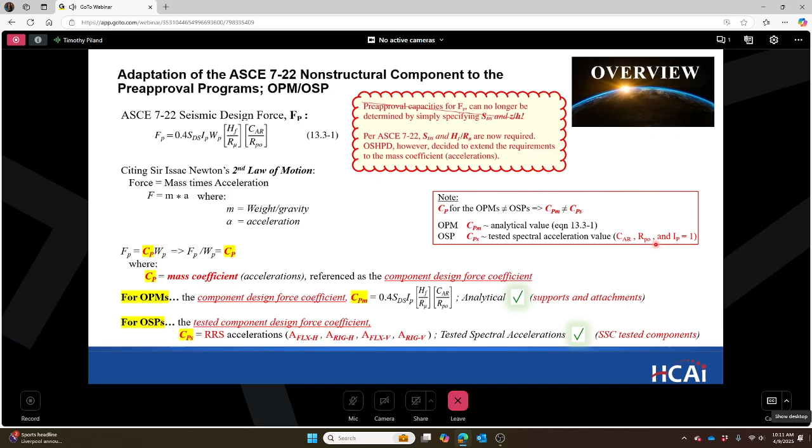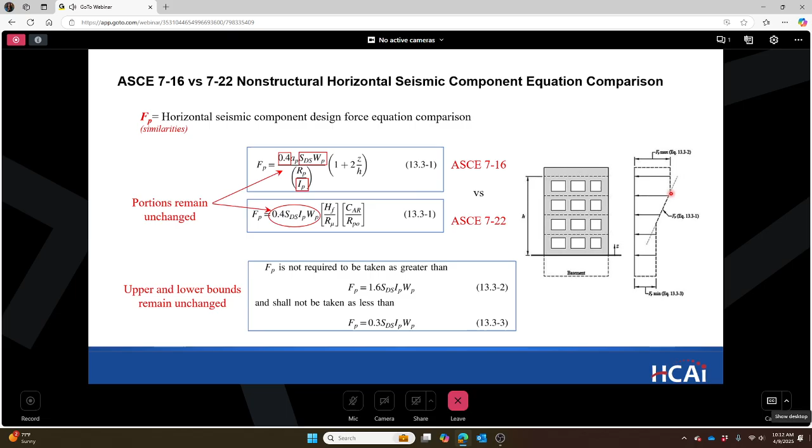So we have A sub P over R sub P, which is now C sub AR over R sub PO. Yes, they have new names and yes, they have new values, but they represent the same thing. It's the component amplification factor or the component resonance ductility factor. The R sub P is the component response modification factor, and the R sub PO is the component strength factor. Same, I would say it's the same.

The C sub AR and A sub P are similar, as both variables possibly amplify the component response, the ability to achieve resonance. The C sub AR is the peak component acceleration divided by the peak floor acceleration. It has to do with the component flexibility and the ratio of component to building period and the ductility.

R sub PO and R sub P are similar in that both variables possibly reduce the component response, where R sub PO is a component inherent overstrength. And you can see as the building and the component coincide, how the amplitude goes up over here. That's just representative.

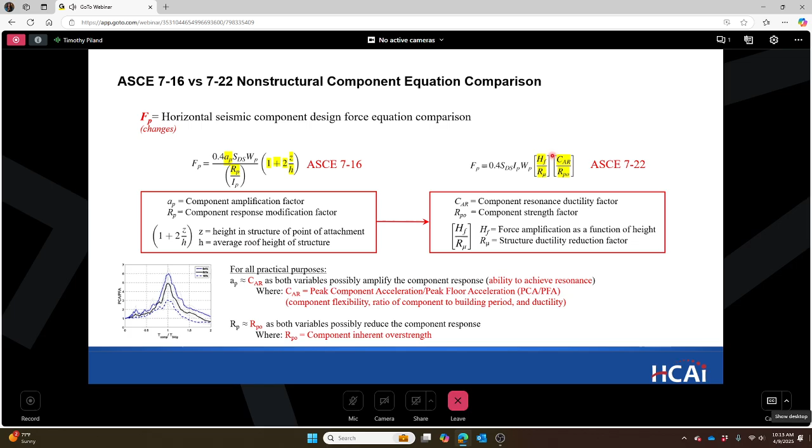The H sub F, going back here, we have the H sub F over the R sub mu. We just went over the C sub AR or the R sub PO. Now we're going to go over the H sub F over R sub mu. H sub F represents basically the old 1 plus 2 times Z over H. Well, now it's 1 plus 2.5 times Z over H. So it's kind of the same as it was before.

There is another variation of it if you happen to know the building period. Here's an example where if you know the building period, it's to your advantage, because it can reduce the maximum value of H sub F. Like this one, where the building period is 2 seconds, the H sub F went from 3.5 using the default equation down to 2.46 using these equations here. This is the lowest approximate fundamental period of the supporting building or non-building structure.

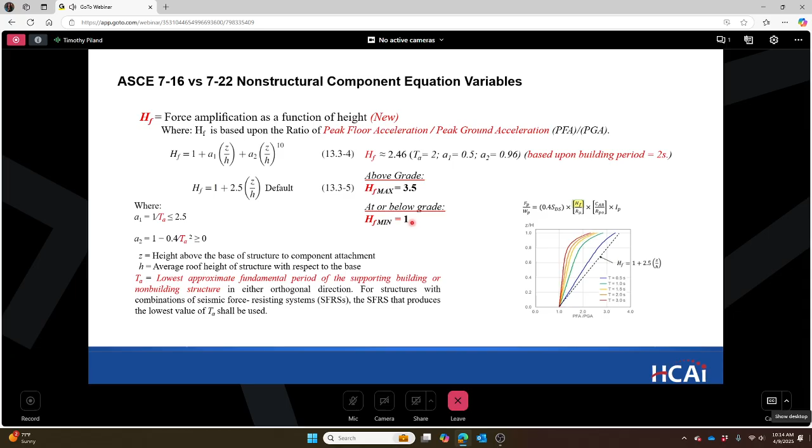Okay, so this webinar is related to pre-approvals. For the pre-approvals, we have H sub F max, which is 3.5. At or below grade, it is 1. That's going to come into play here when I show you the next slide.

We're talking about R sub mu now. This is the new component. F sub P is now a function of the building seismic force resisting system. R sub mu is a function of the response modification coefficient from table 12.2-1 or 15.4-1, and obviously the overstrength factor from the same tables. When it has to do with the ductility reduction factor, when the ductility of the structure goes up, R sub mu goes up, F sub P goes down.

So if you look over here, you have a building that's concrete shear wall rather, and you can see how the force is greater at the same period between that and a steel moment frame, which has more ductility. Now this is just a common sense concept: the more ductile your structure, the less force the structure will attract, the less force that will go into your component. So as you increase ductility, your F sub P goes down.

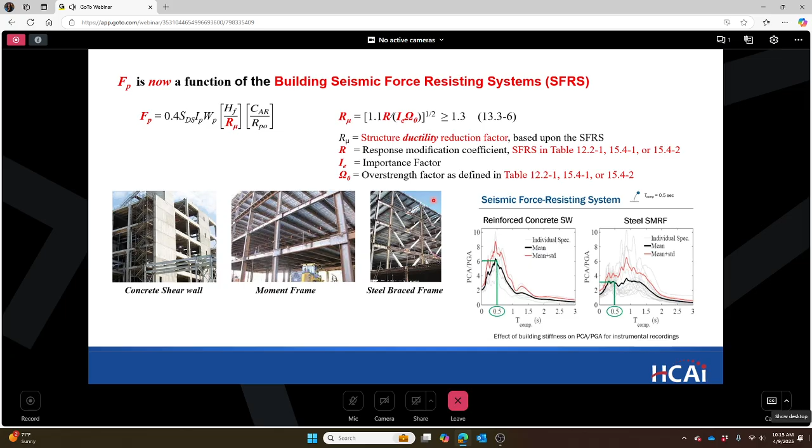So a little bit more on the R sub mu. The R sub mu structural ductility factor is new. It's based on the building's ductility, as we just spoke of. Because this is for pre-approvals, the maximum value you can get for R sub mu, for only one single force resisting system—and I'll show all the force resisting systems on the next few slides—is 1.71, but that's only for one system. The minimum value, if it's above grade, or if the lateral system of your building is unknown, is 1.3. If it's at or below grade, the R sub mu is 1.

So for the pre-approvals, resulting in the H sub F over the R sub mu maximum is 2.69, which is above grade or at the roof. H sub F over R sub mu minimum is equal to 1, at or below grade. So as a minimum, all pre-approvals must be certified for either one or both conditions, dependent upon the non-structural component. Obviously you're not going to put an 87,000 pound genset on the roof, so this one above grade will not pertain—you will only have the one at grade. You can do intermediate levels, but these are the two requirements for the pre-approvals with regard to the OPMs and the OSPs.

Okay, so for the supports and attachments and for certification of the component, we have to make these pre-approvals readily available for any structure anywhere in the state of California for project use. That's the intent, is to reduce the efforts by the registered design professional to use these pre-approvals. It should be readily apparent to them as to whether or not these pre-approvals are applicable to their project.

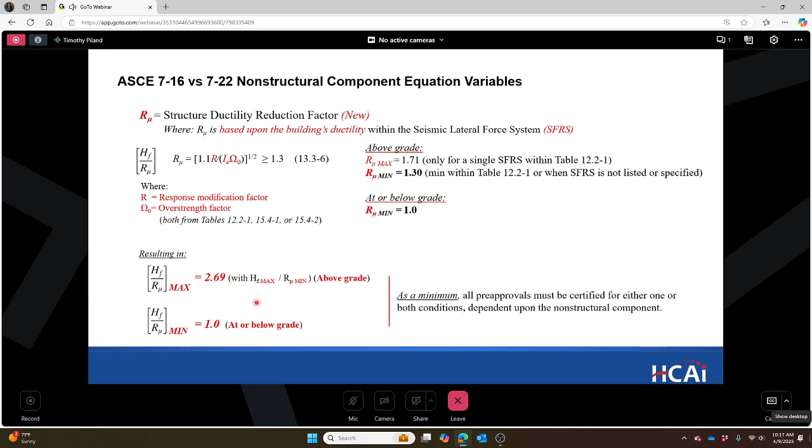So that's why we're putting these minimum requirements within the pre-approval. They'll be on the drawings or in the OSP document itself, for the OPMs and the OSP document themselves. They'll also be on the application for the OSPs.

Okay, so here's the different R sub mu values. This is where R sub mu is 1.3 to less than 1.4. These are mostly structures that have very little ductility, concrete moment frames or whatever. Everything in red are the special systems. I've just created this, you can see they vary. Some of them go up to 1.35 here. There's different variations, as this is the minimum value, which is used by a lot of non-ductile systems.

Okay, and here's the 1.4, it's less than or equal to 1.5 for the R sub mu. Now here you have steel special moment frames, you're going to be in this area a lot. So if the OPM or the OSP is designed to the minimum and maximum values, you can use this to your advantage if you know the seismic force resisting system of your structure. Because if it's a special moment frame, you can reduce the demand that your project will have on the component. So it's to your advantage to use the R sub mu for the building. If you decide not to use it, you have to use 1.3.

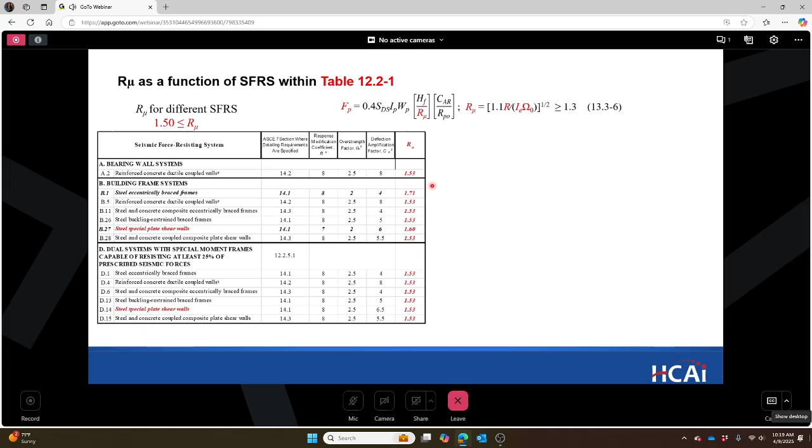Okay, so that's really the only significant change to the ASCE 722 from the 716, the incorporation of the building lateral force resisting system. And it makes perfect sense to incorporate the structure that you're attaching the component within, because if the structure is going to damp out the forces, well then less force is going to go to your component.

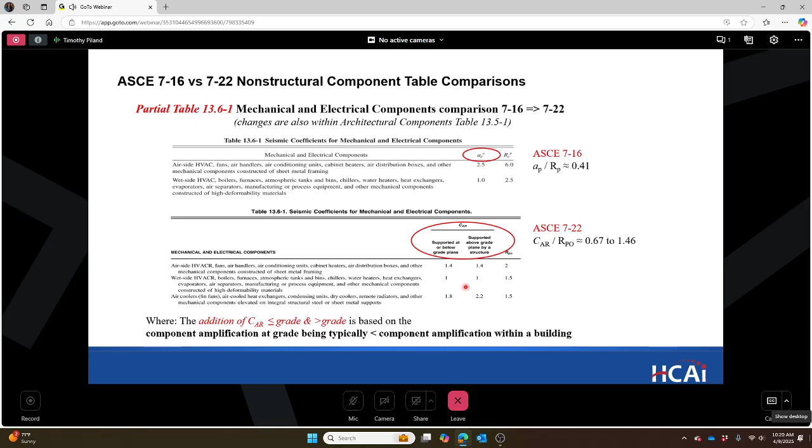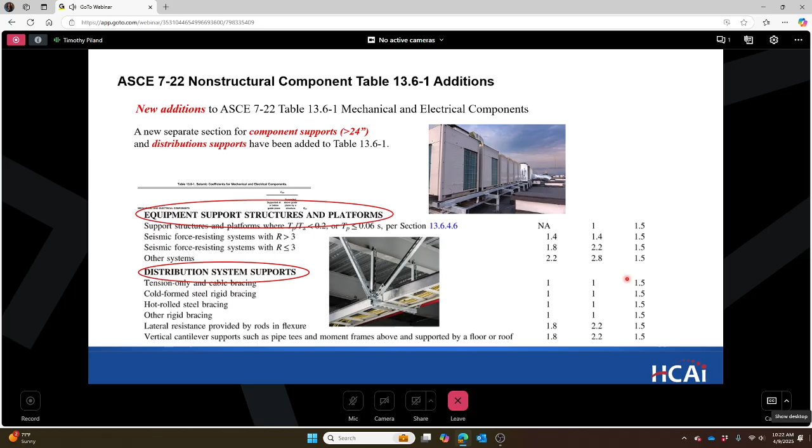So let's go into equipment, support, structures, and platform in a little bit more detail. This is where it gets kind of verbose. So what constitutes equipment, support, structures, and platforms? Well, the commentary classifies it into three groups.

Distribution supports are not equipment supports. Don't confuse the two, these are two different entities. Distribution support is separate from equipment support. Okay, so we're talking about equipment supports.

Now, the three categories that the commentary breaks them down into: the first one is technically not a support, which is one of the three groups. If it's less than or equal to 24 inches, it's not an equipment support. So up to 24 inches is considered an integral support. I don't care if it's a lug, skirt, or saddle, it doesn't matter. You have to design the connectivity between that and the component with the same C sub AR and R sub PO that you would do the component. But anything up to 24 inches is not an equipment support.

If it's over 24 inches, they break it down into two categories, although for all practical purposes, it gets the same C sub AR and R sub PO, so it's kind of moot. It's the assembly of structure members that provide support for a piece of equipment or system, including the moment frame, brace frame, skids, and legs greater than 24 inches. This is where the commentary also delineates equipment supports from equipment platforms, with platforms supporting multiple components or systems, but the differences are inconsequential, as both equipment supports and platforms have the same C sub AR lateral coefficients, so it doesn't really make any difference.

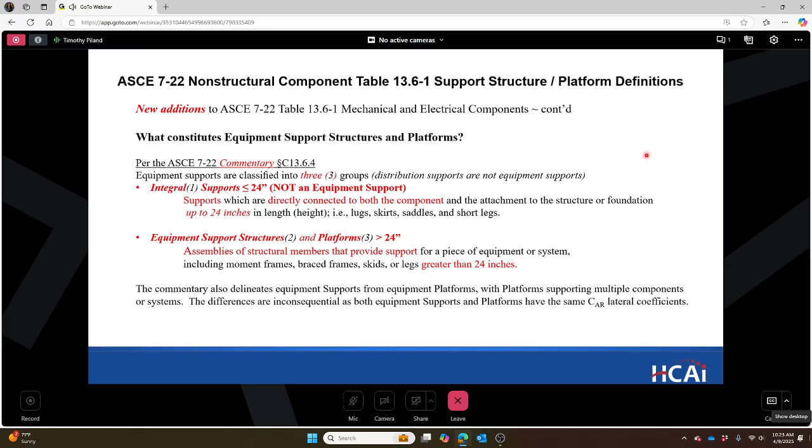Now, when you think of a support or a platform, you think of something supporting it from the base, right? Because that's just natural, it's supporting it. However, let's look at these three different cases here. This is the first one: it's 24 inches, so this is not an equipment support or a platform. I don't care if they're legs, lugs, or skirts, it doesn't matter. If it's up to 24 inches, it's not an equipment support.

Okay, this is suspended equipment. And if this is greater than 24 inches, this is considered a support. This is the integral support down here, which connects to whatever your component is, but this portion is considered an equipment support. This is going to make a difference in some of the OPMs. And this is the equipment platform, which is an obvious one—if it's greater than 24 inches, then it's a platform.

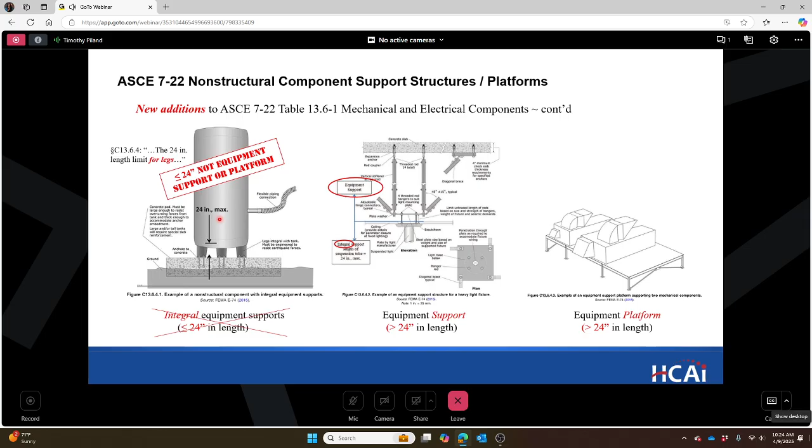Hopefully that's really clear, these two are the ones that we're talking about. This is not an equipment support platform. So now we go into the different categories for the equipment, support, structures, and platforms. There's four you can choose from. First one deals with the component, the T sub P.

Okay, so let's talk about what the T sub P is. It's the fundamental period of the component, including the support and platform and attachments per section 13.3.3—we call it the component assembly. If it's greater than 24 inches, then the entire assembly period is what you're trying to determine. And if you have a component which is flexible, I don't care how rigid your support is, the entire component assembly is going to be flexible. It's not going to be rigid, no matter how you look at it. And this is the approximate fundamental period of the building.

So you look at this first section here, and I'll go into all these different categories on the next slide. But it says, this is a note that I added here, 13.3.1.3: the component resonance ductility factor for mechanical electrical equipment mounted on equipment and supporting platforms shall not be less than the component resonant ductility factor used for the equipment support structure or platform itself. So the translation is, if a component is attached to a support greater than 24 inches, the component C sub AR must be greater than or equal to the support platform. Okay, that's what that means.

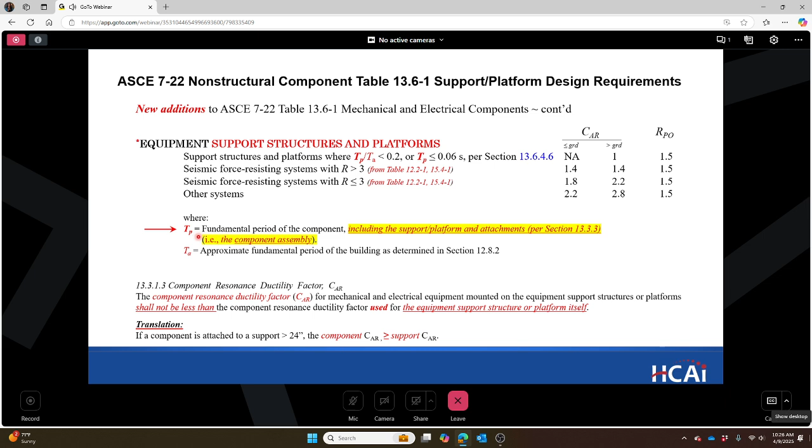So now we have the four different systems, and we have the fundamental period for the component assembly, or the fundamental period for the building and the component assembly, T sub P. So let's talk about T sub P for just a second, because this is going to get a little complicated. We'll accept any version of what you submit if you provide a basis, but it has to meet some logical engineering approach in order for us to accept it. So this is the period determination of a component assembly: the fundamental period of the component, including supports and platforms attachments per section 13.3.3, as I mentioned on the previous slide.

It's component assembly. The component period is not a function, nor is it related to C sub AR. It used to be that if your A sub P was 1, your component was considered rigid by some people. It's like, that has nothing to do with whether the component is rigid or not.

The C sub AR, which is the component resonance ductility factor, ability to achieve resonance. So in the commentary in 13.3.3, the component period states in part, the fundamental period, T sub P, shall be determined by the typical period equation.

Further stating, provided the component supports and attachments can be reasonably represented by a single degree of freedom, spring, and mass system. I can tell you for sure that active and energized systems typically cannot be modeled this way. You just can't do it. Now maybe perhaps for shelving, but CT equipment or other components that are in both the OPM and the OSPs, you may be hard pressed to prove that it's a single degree of freedom, spring, and mass system.

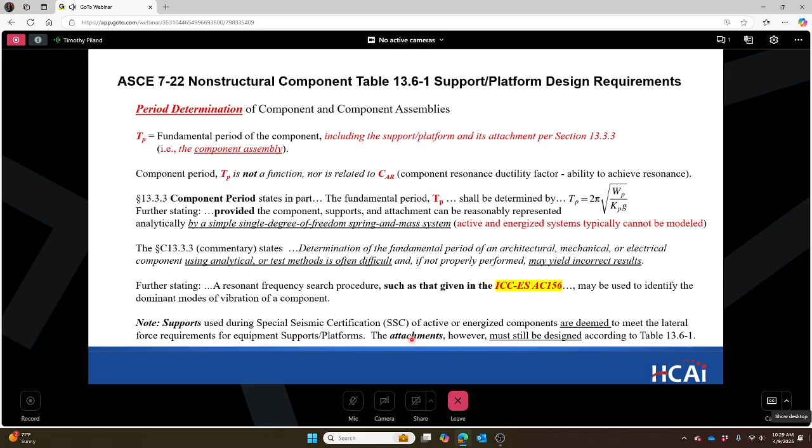So if your component is on a support and you shake table test it, that connectivity between the component and the support, as well as both pieces of equipment, are seismically certified to be installed based on the AFLX accelerations that the component was tested to. So you don't have to worry about the support if you shake table tested it with the equipment.

So we go into the 4 different sections. First one is 1A and 1B. We've seen this before on the 2 slides back. We have the component assembly period over the building period. So what this says is, if the component assembly period is less than 20% of the building period, then you can use C sub AR of 1 and R sub PO of 1.5, which is this. If it's at grade, you can't even use this section for the building, obviously.

Now we're talking about T sub P. This is the first section we're talking about. This is 1B, the footnote 1B. If a component is within a building or structure, and the component assembly is rigid, then you can use the C sub AR of 1 and the R sub PO of 1.5.

Using a support and platform designed using Chapter 14 material standards. So like I was saying on the previous slides, this condition is going to be very difficult for active and energized components and for a lot of the OPM equipment that used to be anchored, if it's in the OPMs, if in fact it's on a support. You're going to be hard pressed to get the entire assembly to be rigid.

Go to number 2. Number 2 has 2 sections. These are the R values. Must conform to table 12.2-1 for both of these conditions, where you have an R greater than 3 and R less than 3. And you have different values over here for at grade, above grade, and the R sub PO.

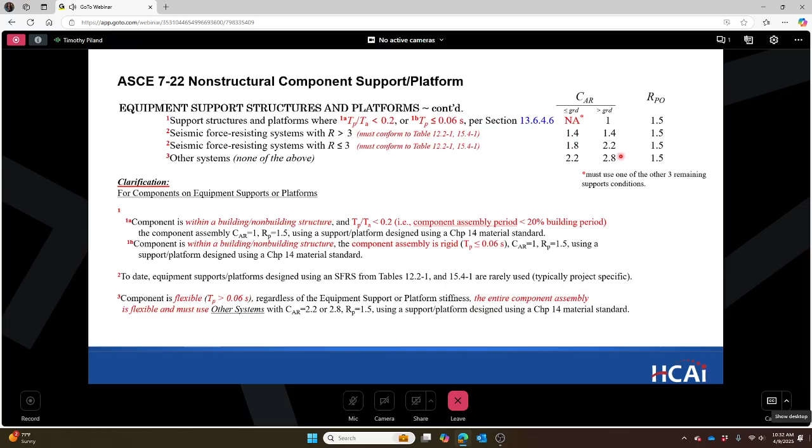Here's an example. There's other examples. This wasn't the best one, but it's the one I had. This used to be a video, but it didn't lend itself to a PowerPoint presentation. So you have a rigid support. It doesn't look like it's rigid, but it is because it mirrors the shake table if you see the video. And this is a flexible component, so the entire assembly is flexible.

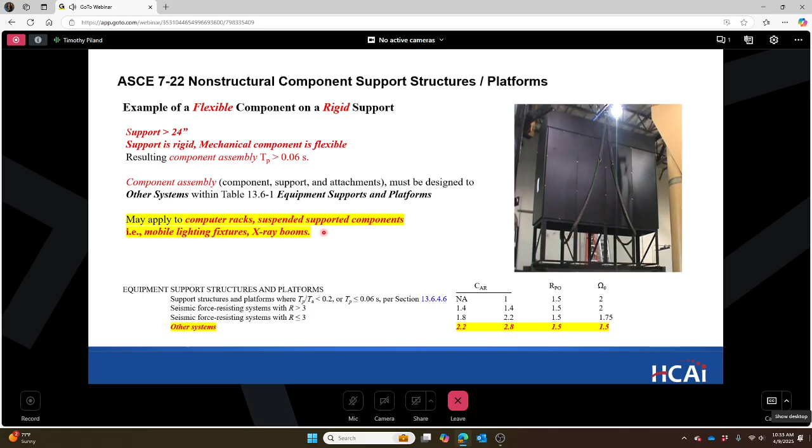As a result, you have to use the other systems within table 13.6-1, the 2.2 and the 2.8. This is for the design of the component connectivity to the support, and the design of the support to the structure, and the design of the support itself, actually. This may apply to computer racks, because computer racks are nothing more than supports, suspended and supported components, i.e. mobile lighting fixtures, X-ray booms, etc. So this is a significant increase for the supports.

Now we talk about distribution system supports. These are new, so there are 6 different categories. 4 of them are bracing - they're bracing, it's 1 and 1.5. Other than bracing, it's 1.8 at grade, 2.2 above grade. It's pretty simple.

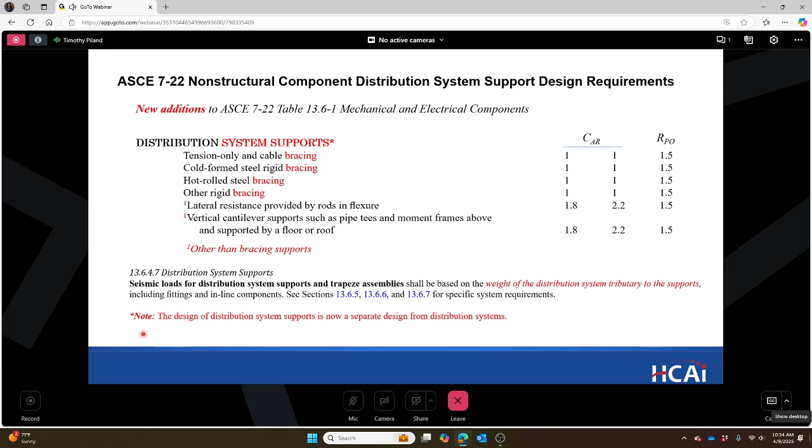The bracing is designed for the distribution system, separate from the design of the distribution system. The distribution systems have their own C sub AR and R sub PO values. How you design the support, it shall be based on the weight of the distribution system tributary to the support. You don't use the C sub AR or the R sub PO for the distribution system for the support. The support has its own C sub AR and its own R sub PO. That's why I put this note here: the design of distribution system supports is now a separate design from the distribution itself. And you can look up these sections for specific requirements.

I just added this slide because the 722 will incorporate the SDS percentage increase across the state of California. And you can see from this picture that was given to me by Dr. Hussein Bhatia that the majority of the cases they've gone up.

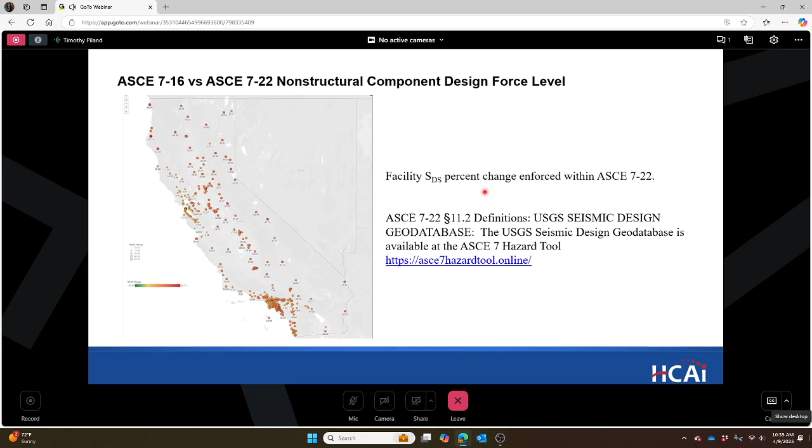So make sure you incorporate the new SDS for your specific site for your project. This is for the project design engineers. Okay, and you just need to go to the Hazard Tool and determine what your SDS is for the site.

So now we're going to go into comparisons between the 716 and the 722. It doesn't always look this grim. Okay, so this is mechanical electrical components.

This plot over here is using two different values. It uses the old value for mechanical electrical components, typically air-side HVAC units and motor control systems as an example. So the C sub AR is 1.4, the R sub PO is 2. In 716, it was 2.5 and 6. Now I just used a random SDS value of 1.6, and a Z over H equal to 1. The I sub P is 1.5. And for this, I show the R sub mu varies

across the bottom. And the T sub A for the building period varies, and it varies here down to where you get to the previous code, which is the current code, which is 716. So a T sub A of 2 is this bottom purple line here. And as the period gets smaller, it goes up to the default equation where your H sub F is using the default value.

So for mechanical and electrical components, if you're in a moment frame and you don't use the building period, you're going to be here because it's an R sub mu of 1.4. And this is the default value for the 722, the force level, compared to the 716. If you don't know the lateral system, or you have a lateral system which has very little ductility, you will be over here. So this is a significant increase, but do not despair.

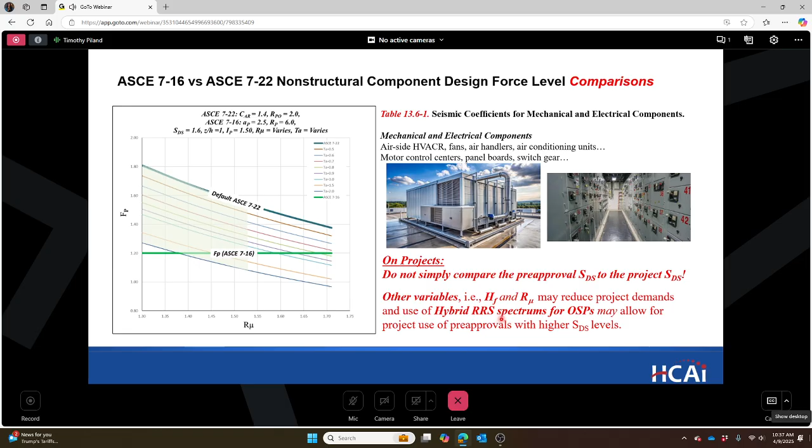At this point, I need to interject this, directed towards manufacturers. I don't know how many manufacturers are attending today's meeting, but it's in your best interest to renew your pre-approval to the current code. For one, it's more readily usable by the registered design professional on projects, who is basically your client because they're buying your product. With the C sub P value I talked about earlier, that's going to be listed on the pre-approval, and the design professional of record will simply calculate his project demand, the C sub P for his project, and compare it to the capacity C sub P of the pre-approval.

The second reason to upgrade all the pre-approvals, the OPMs and the OSPs, is that some of the forces go down. So it's in your best interest, because the code level is less restrictive on the newly adopted code.

You can use it for a 716 project, for a 2022 project which uses 716. The typical methodology is that the authority having jurisdiction, in this case OSHPD, if the code is less restrictive on an upcoming code, and we've adopted that code in its entirety, or at least the part we're referring to, then you can use that on current codes.

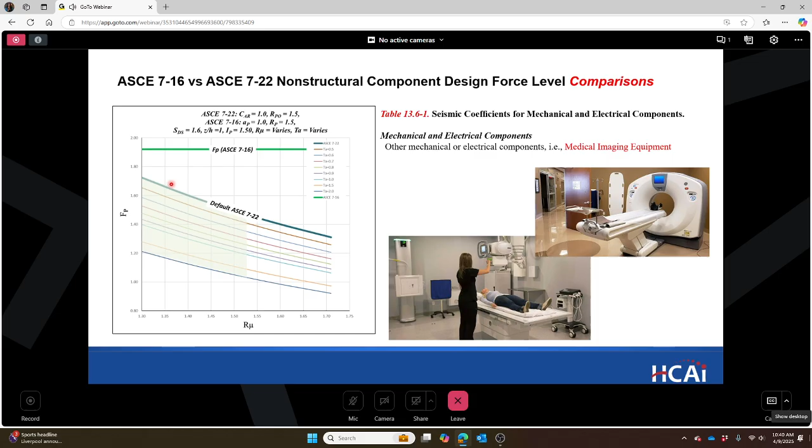If you don't know what it is, it's gone up significantly over here. But if you upgrade your pre-approval, it will meet the current code for the 2025 CBC without complications—the design professional of record won't be confused about what capacity the old version of the pre-approval was designed to. Going back to a previous version, like 716, for an OPM designed to 716 requires an extra step to determine its capacity. If you update it, there's no extra step, so it'll expedite the entire process.

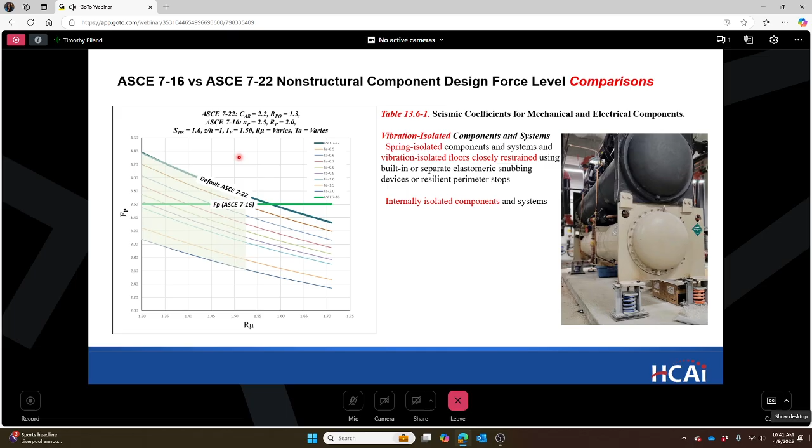So it behooves the manufacturers to renew their OPMs, the distribution OPMs, to take advantage of this and use them in the current code.

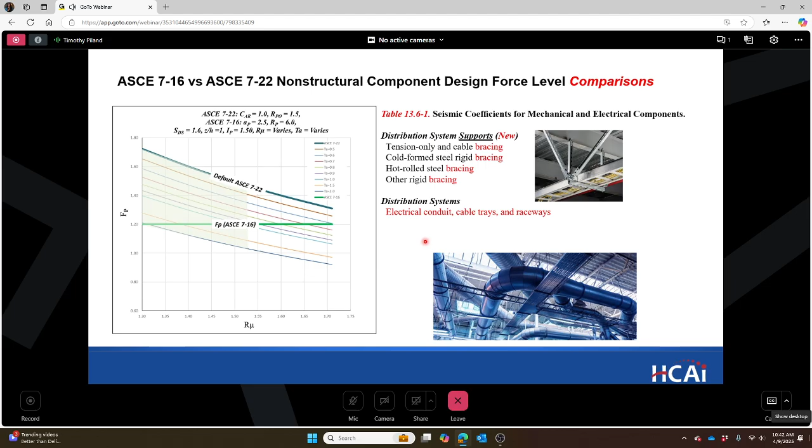And this happens to be the distribution system supports. You can see how the supports now have gone up.

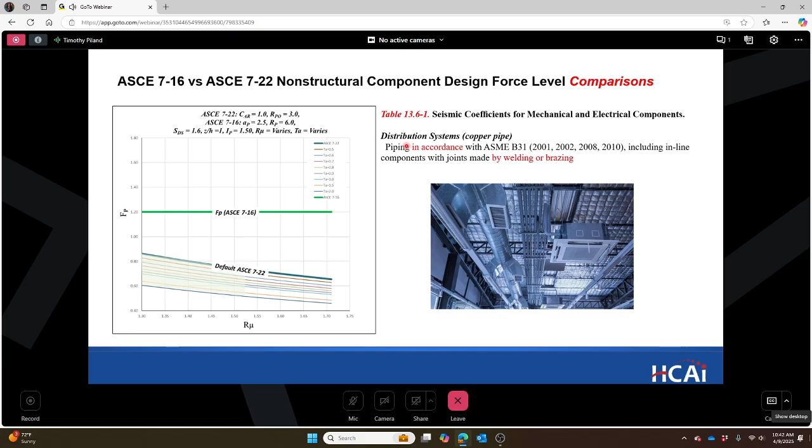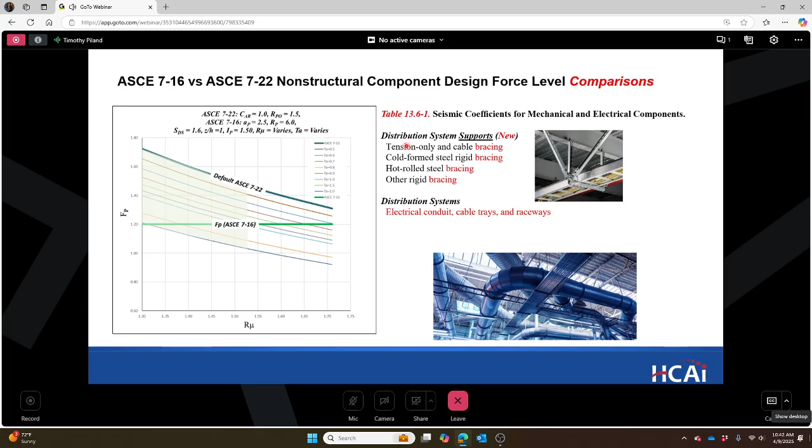So although if I go back here and look at the distribution system, the spacing will increase—you'll be able to make or increase the spacing rather, but the supports will be farther apart because there's less demand on the distribution system. And then the supports will be a little more robust, but it may balance out by the time you determine the load to the support itself, because on the existing pre-approvals, they've already been designed to a higher value.

This is one I picked from 13.5-1, coefficient for architectural components. These are partitions, now separated into less than 9 feet and above 9 feet. You can see if you don't account for the building period here, they increase for less than 9 feet, and they significantly go up for partition walls in moment frames, maybe twofold or so. So this is a significant increase.

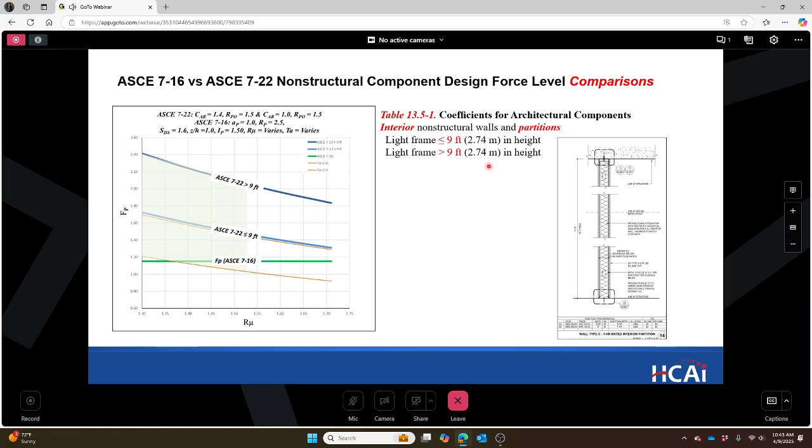So we have the affected OSHPD pre-approval program. For the OPDs, there's 1, 2, and 3. Those are in-house pre-approval programs, and we're going to do those in-house and redistribute them out on our website so everybody can use them with the new code. We only need to concern ourselves in this webinar with the OPMs and the OSPs. And as stated below, the OPDs are being updated.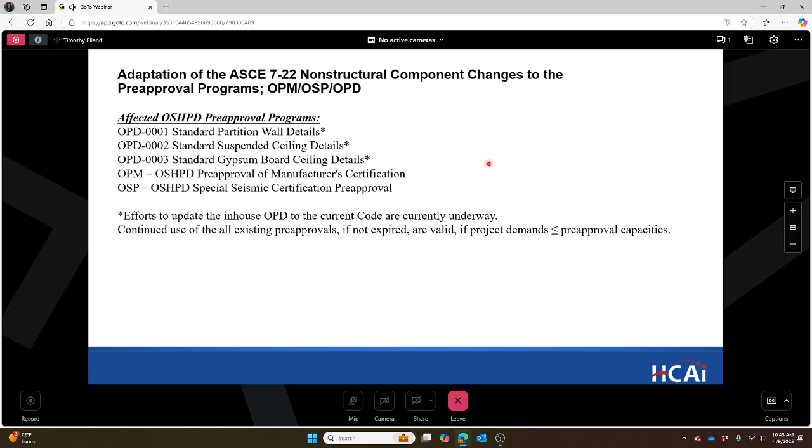So, can you use the existing pre-approvals for 2025 projects? Yes, you can. You don't have to do anything. The only one you can't use is an OSP which is expired. Everything else is fine, you can just leave it alone.

You don't have to change anything. So the existing OPM pre-approvals are valid for any project, regardless of the CBC version. Renewal and new OPM pre-approvals for 2025, however, require updated calculations and drawing revisions reflecting the current code. The OPM will have a new updated application, which we should have on our website by July 1st.

That's our goal, is to get the updated application for the new OPM pre-approvals. The existing OSP pre-approvals, which have not expired, are valid for use on any project, regardless of the CBC version. Existing shake table tests are valid on any projects also. The renewal and new OSP pre-approvals will require an updated application that'll list the C/P values for the OSPs, which is the horizontal accelerations, A-flex horizontal, A-rigid horizontal, and the other two for the vertical.

Okay, the existing OPD approval is valid for use on any project. You just have to calculate the capacities. So I'm going to go into how you do each one. It's fairly simple, it's all simple. It's just that it's easier if your pre-approval is updated to the current code. I can't stress that enough. It makes life so much easier.

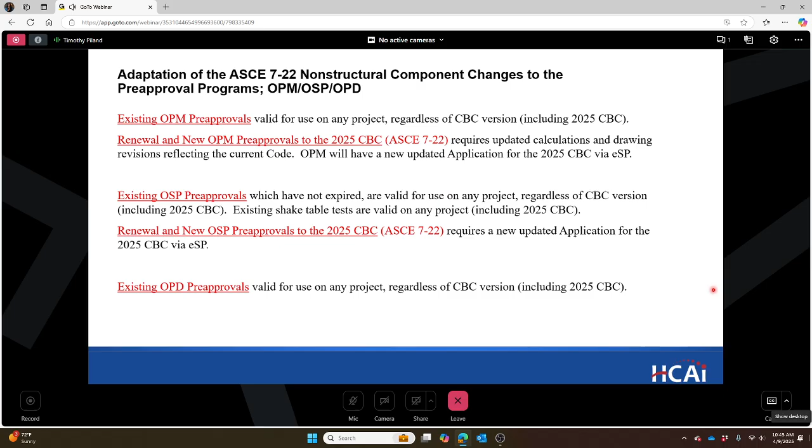So we talked about this before. There's two design professionals of record, and we're going to talk about their responsibilities for each one. We have the pre-approval design professional of record who submits a new or renewal pre-approval to OSHPD, and we have the project design professional of record who submits the pre-approval for project use. They may be one and the same, they may be the same person, but for the most part, they're kind of different people here.

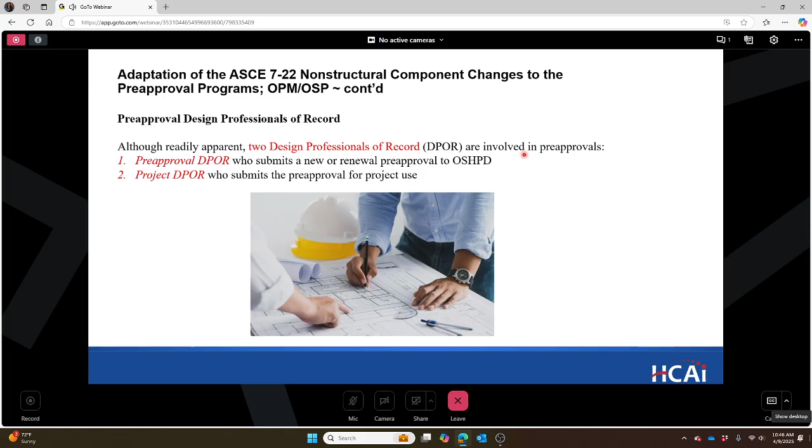So let's go into the OPMs. This is for the supports and attachments of equipment. The idea is to reduce construction costs, so that means expedited use of the pre-approval. If the design professional of record for the project has a difficult time ascertaining what the capacity is of the pre-approval, it slows down his time, causing increase in cost. We don't want to do that, we want to reduce the effort. That's why we're encouraging everybody to update your pre-approval, your OPM, to the new code so it's readily comprehensible to the design professional of record for the project to use that pre-approval on his project.

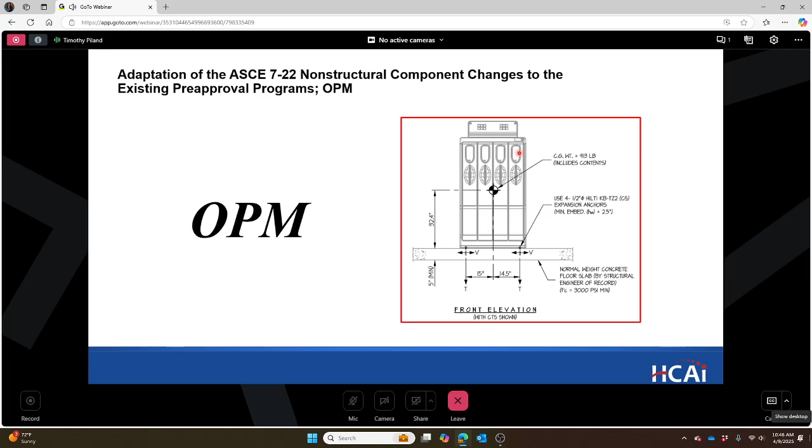So how do you use an existing OPM for the 2025 CBC? Say it wasn't updated, you have to use the existing one. So what the design professional of record has to do is go back to the 716 equation. If the C/P is not listed on the OPM or OSP, in other words, the capacity to which the OPM was designed, then he has to go back in and calculate it based on whatever variables were put in for that OPM.

And then from there, he calculates the 2025 CBC project demands, and the project demands must be less than the F/P capacity for the pre-approval. So that's an extra step the registered design professional has to take if, in fact, you have an OPM which is not designed to the current code. If it's designed to the current code, they're going to be required to list that capacity, and you can readily check this just by observation.

He still has to calculate his project demands. That's neither here nor there, that'll always be there, but you want to make the pre-approval more efficient. So the OPM design force coefficient for both the pre-approval and the project must be listed on the project calculations. And this is the design professional of record submittal responsibilities, by the way.

I forgot to mention that in the beginning - the coefficients for both pre-approval and project must be listed on the project calculations so we can readily comprehend whether or not it's valid for use on your project. However, it may also be included on the construction drawings, although it doesn't have to be, to possibly reduce an amended construction drawing if they make some modification in the field. Now you know your capacities for the pre-approval and your demands for your project, and someone in the field could easily check and approve it, reducing an amended construction document to a non-material alteration, saving time and cost.

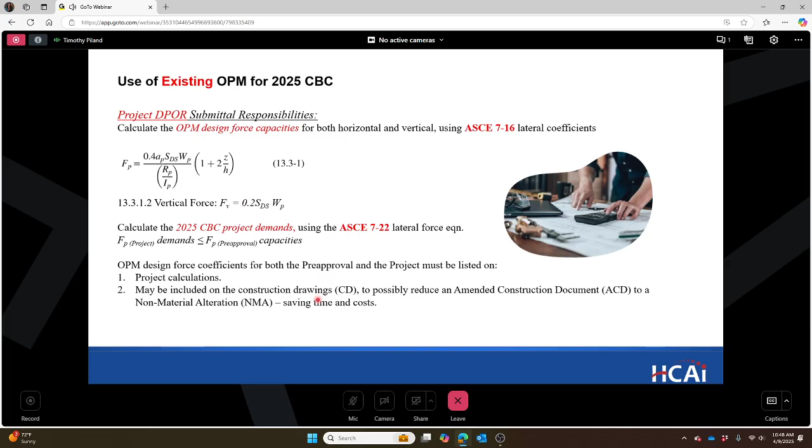Okay, this is for use of an existing OPM and design responsibilities for a project design professional of record. And this is how you would do it - use of an existing OPM.

This is an example pulled off our website. It's public information, designed to the 2022 CBC, but the 716 ASCE. So they would go in here and determine these values. Now if this one happens to list the coefficients over here - not all of them do this - you'd have to go in using these variables and determine the capacity of this pre-approval for the condition which it is designed to, then compare it to your project demands.

As I stated, the OPM design coefficients may already be listed. Some of them do, some don't. It's hit and miss.

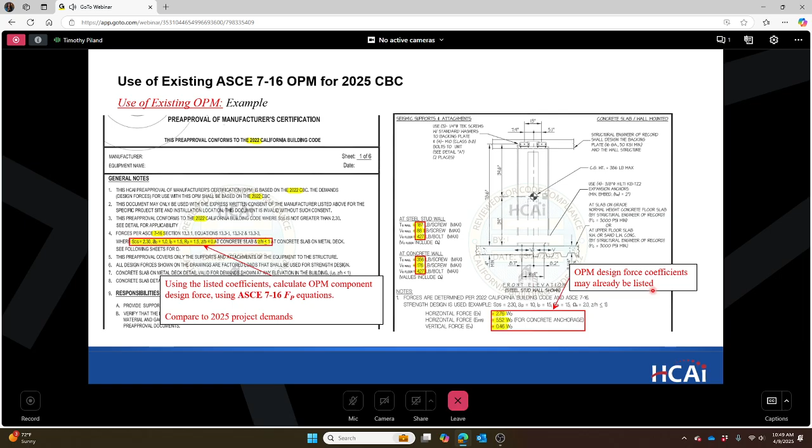So this is renewal, update, or a new OPM 2025. The component design force coefficient, C/P - we call it CISAPM for the OPM, CISAPS for the OSPs. CISAPM is simply the FP over WP, which is all these design coefficients shown in red here. This must be listed on your pre-approval, your OPM, so it's readily comprehensible by the project design professional of record to compare with the demands he has for his specific project. For each different configuration, you're going to have a CISAPM.

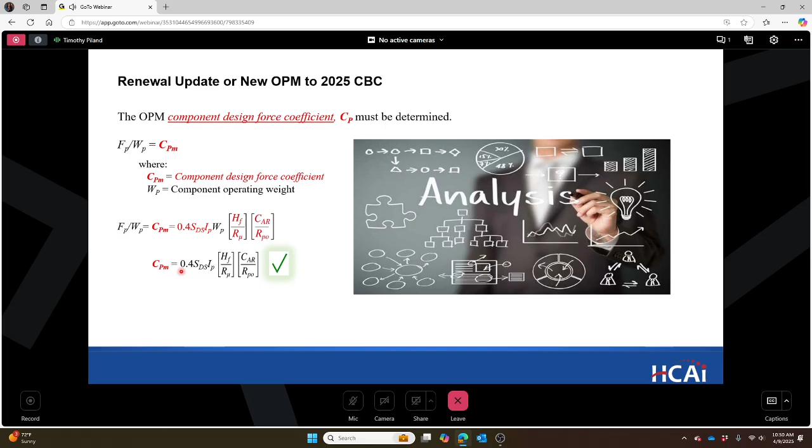These are additional requirements for the submittal design professional of record. You need the CISAPM for both FP/WP and FV/WP. You need to list the SDS, the ISAP, the CISA-AR, all these variables. Updated or added anchorage forces, T sub U, V sub U, and specifying whether or not omega was used for each different component configuration.

So you're going to have one at roof, maybe one at grade. You may have different mounting configurations. For each different configuration, you need these variables listed, so the design professional of record can come in and say, I have this condition, this is the capacity for this OPM for this condition, here's my project - I can readily compare it and use it on their project.

As a minimum, H sub F over R sub mu must be listed for above grade at 2.69 and/or at below grade at 1. Specific intermediate building elevations and seismic force resistant systems only are not allowed - you have to use this maximum and minimum value. You can use others, but you can't just list specific systems, because it may be overlooked during design, installation, or future equipment relocation.

If you have KBs and you need to change it, or TZs and you need to change it to TZ2s, you need to do that as well. You need to update the anchorage capacities to the latest ICC ESR version. Don't leave old standards on these pre-approvals - please update everything so it's current, update all listed reference standards.

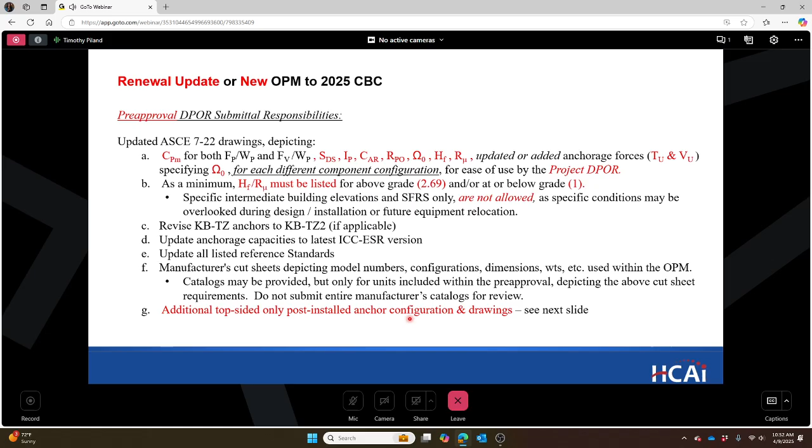Here's an additional requirement - we have an additional top-sided post-installed anchor configuration and drawing. Top-side only post-installed anchor configuration, that's what we're trying to do. The reason is because through bolting increases construction cost, and we're trying to get away from using through bolting. It creates contractor change orders and greatly increases construction cost. So it may not be applicable in every condition - we realize that, that stands to reason.

If applicable and within reason, for the submittals, add concrete over metal deck component anchorage using the top-sided only post-installed anchor connection as opposed to through bolts. Reducing the OPM design force F sub P, within reason, is what I'm trying to say here. An SDS at 0.25 serves no purpose, so that makes no sense. You can achieve this by providing additional supports and attachments.

You may redistribute the component attachment forces if you modify the support and attachment, using a larger post-installed anchor, possibly—though you can only get them so big—or by changing the mounting configuration if possible.

And if this is omitted, then give us a written valid basis within your submittal so that we can go, yes, that makes perfect sense. They obviously can't do it here, but at least you made an attempt.

This is intended to reduce project change orders observed through bolting, and it reduces the labor cost associated with through bolts. So that's another requirement for the design professional of record submitting the pre-approvals.

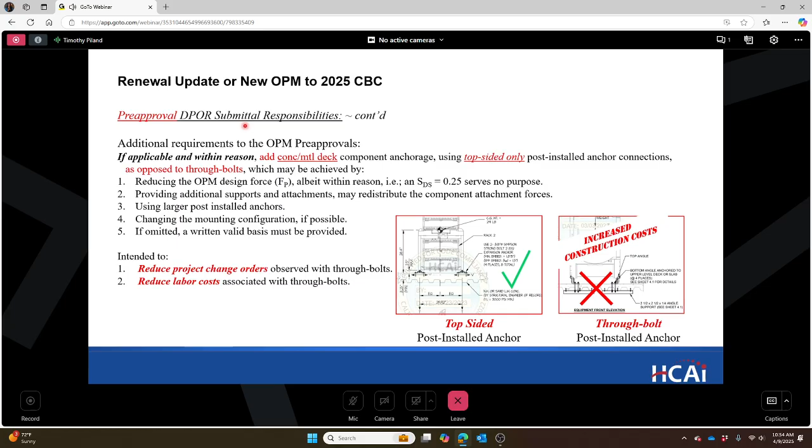Additionally, although not required, you can have both versions listing ASCE 7-16 and 7-22. You already have the ASCE 7-16, and you could put one, typically the 7-16, in an appendix, so they're approved for both codes. You don't have to do this, but you could.

How does the project design professional of record—what are his responsibilities? Well, he calculates his project's 2025 CBC project demands and compares them to the capacities.

And if he's using a new or renewal updated OPM, the capacities will be listed on the drawings, and he'll be able to easily comprehend whether or not he can use this pre-approval for his project and his installation condition. Again, the OPM design forces for the project design professional of record need to be on the project calculations. You can also include them on the construction drawings if you want, possibly reducing the amended construction document to a non-material alteration.

This is the renewal, update, or new OPM, and how you would use them. You're going to list all these variables, as I mentioned before. The C sub P is the most important one, because that's what the design professional of record can readily use to determine whether or not the pre-approval can be used for his drawing.

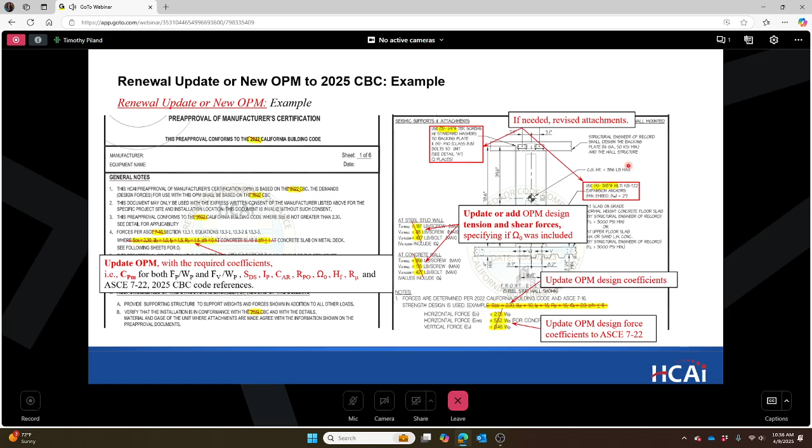So you would update and add the OPM design tension and shear forces. You would update the OPM design coefficients, updating the OPM design force coefficient to the 7-22. These are the variables here, but he has them listed in two different places, so you'd update those, and then if needed, revise the attachments and the supports. Okay, so now we go into OSPs.

Okay, so this gets kind of down into the weeds a little bit, but it'll allow you to possibly speak somewhat intelligently about the demand and the capacities of your OSP compared to the demands on your project. For those of you who submit these pre-approvals, this is nothing more than a review—you've seen this a thousand times. It's in every test report, and I've looked at test reports for well over a decade.

So, the OSP pre-approval: the OSP is the tested component design force coefficient, C sub PS. It's defined using a very simple method. F sub P is equal to this C sub PS value times the mass, where the RRS accelerations, required response accelerations—C sub PS is the tested component design force coefficient. It's basically the coefficient to the mass, which you've shake table tested.

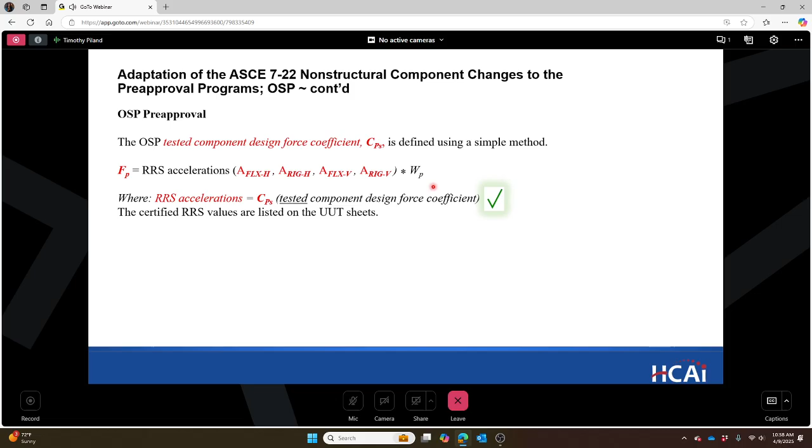The RRS values are already listed on all UUT sheets, so they're already there. You just have to revise the application and perhaps your certified component tables and certified subcomponent tables, if in fact you're still calling out the S sub DS and the Z over H—it needs to be more in line with the C sub P values, which are the accelerations for the component.

So the component is either going to function after the shake table test or it's not. So the I sub P is equal to 1, these are all equal to 1. That's why you can't compare OPM C sub Ps to OSP C sub Ps. It doesn't make any sense.

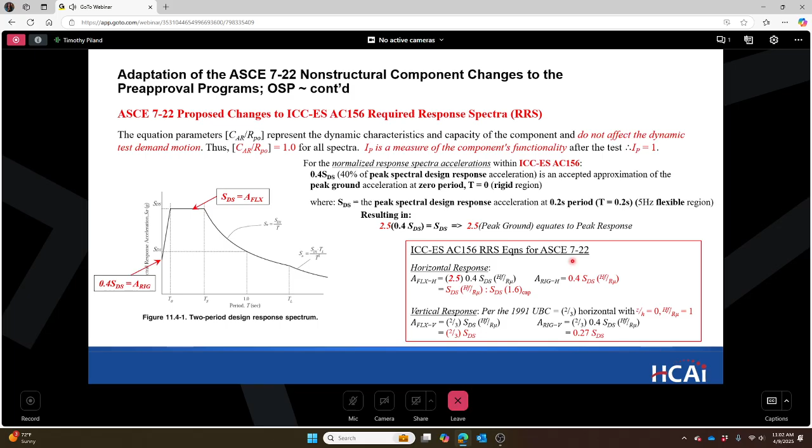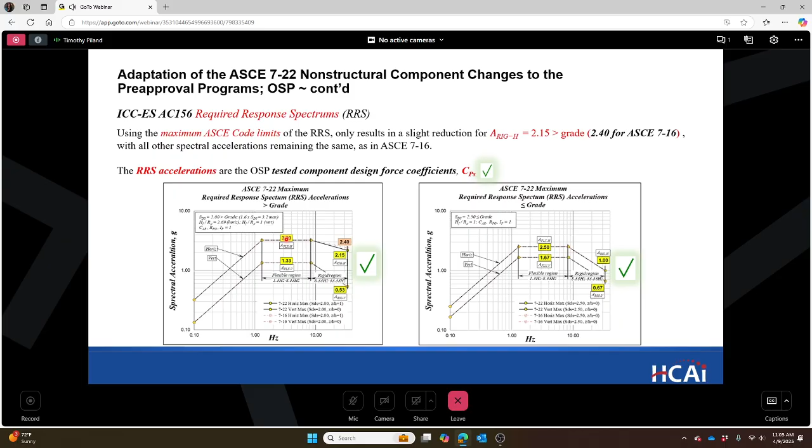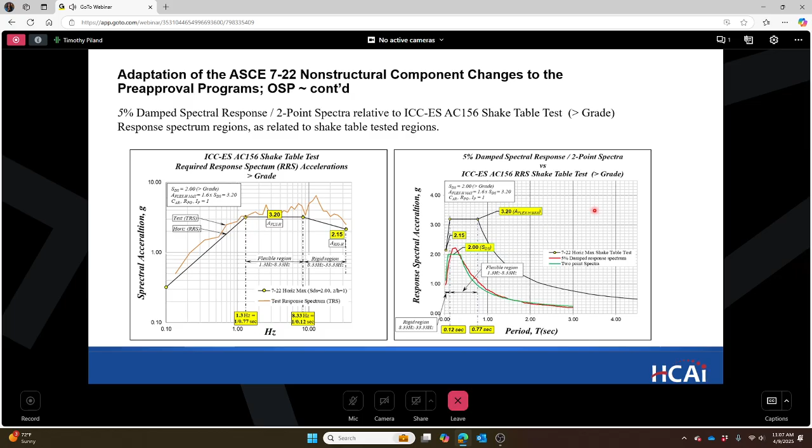So how do we use existing OSPs? The existing OSPs - this one happens to show a hybrid response. It's 2.0 above grade, and it's 2.5 for the SDS at grade. So you end up with 3.2, 2.4, 1.67, and 0.67. If it has this on the OSP, you can use it anywhere in the state of California.

So if you want to know the capacity for this OSP, the F sub P would be the A flex accelerations times the mass. And if the design professional of record wanted to know the capacities required for his site, his H sub F over R sub mu will be less. If this isn't maxed out to the maximum possible, he can compare his to the current OSP he's trying to use, and he calculates his using these equations here.

You substitute the SDS, the H sub F over R sub mu, and these equations, and you end up with these 4 acceleration components, of which you can calculate the F sub P horizontal and the F sub P vertical. Your project has to be less than those that were tested - the capacities. So that's how you would check an OSP against your project, if in fact you needed to do it. It used to be we just go SDS and Z over H; now there are other variables - the H sub F over the R sub mu comes into play. So this is the way you would check it.

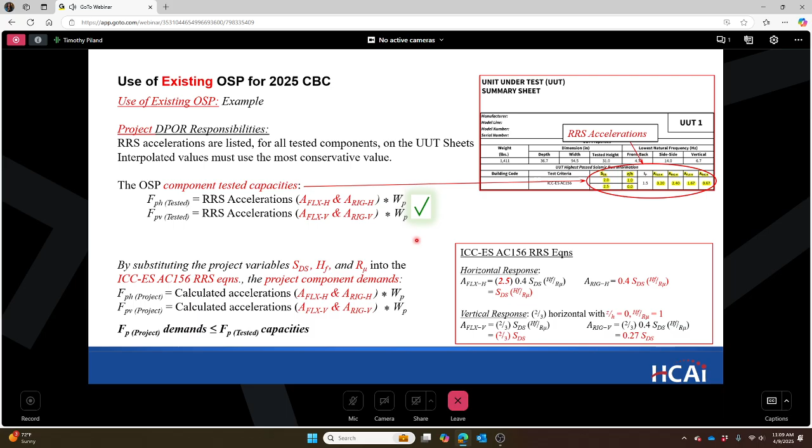If you're using an existing OSP designed to 716, again, that would be for the OPM, for the supports and attachments. If you want to use it for that, you can, or you can come up with your own values, as long as you provide a decent basis.

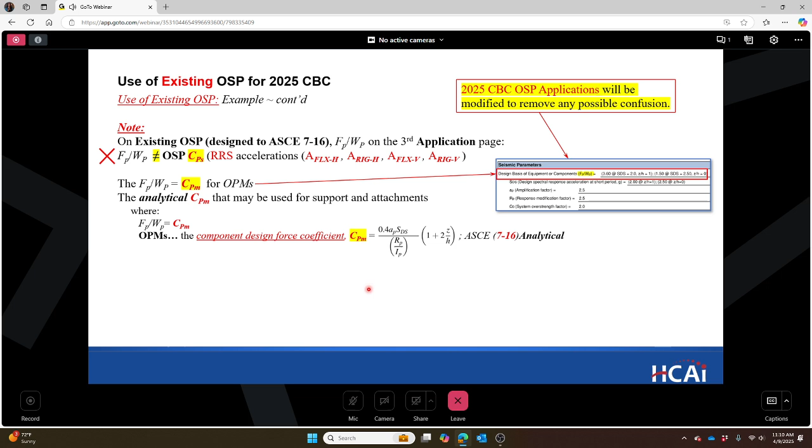And this is going to be modified. We're going to have a 2025 CBC OSP application, which will change these parameters. So that's the existing one. Now we have the new ones: the project design professional of record responsibilities.

So he's going to come over here. I'm anticipating this will be changed on the OSPs. It will now reflect the R sub mu and the H sub F. It could be one column, two column, whatever. It should be something other than the Z over H, which is used here.

You should list the R sub mu and the H sub F, and then you're going to have a revised value. If in fact you've tested it to the maximum capacity, this will be less.

So for the component tested capacities, again, you have the accelerations, you have your mass, you can determine what the tested capacity is. And then the project design professional of record, if he needs to check this, he can use his values, substitute them in these equations, and determine the demands for his specific project, which must be less than the tested capacities.

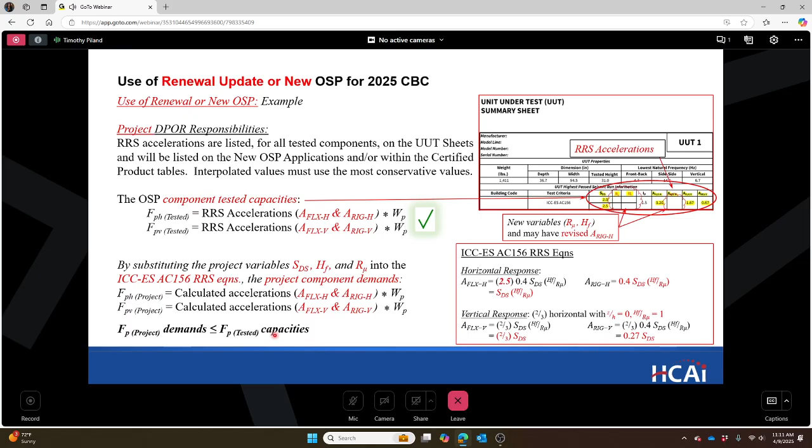So the updated application, which we should have online by July 1st, we're revising it now. We have to get IT also involved so that you can select whether it's 716 or 722. We're hoping July 1st that'll occur.

The new application, you will list the C sub PS for both horizontal and vertical forces, which is the accelerations, and the corresponding SDS, H sub F, R sub mu, and I sub P.

Along with that, you need manufacturer's cut sheets depicting the model number, configuration, dimensions, etc., as used with the OSP. Catalogs may be provided but only for the units included within the pre-approvals. Don't send the entire manufacturer's catalog because we don't want to go through everything.

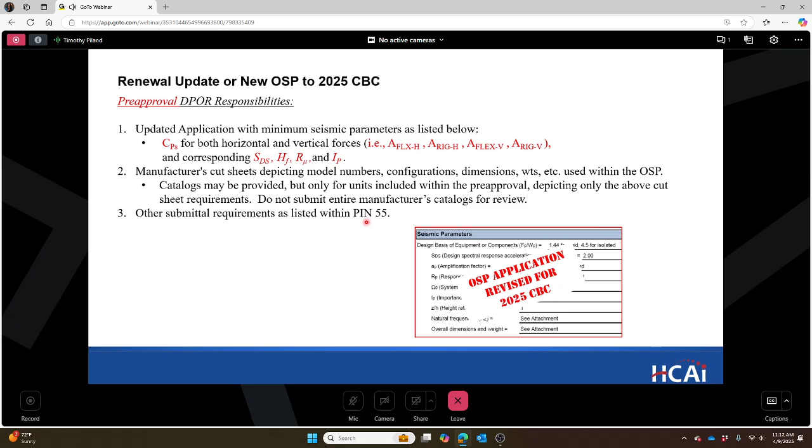And then the other submittal requirements as listed in Pin 55. And that's kind of the summation of everything. If you need to email me any questions, here's my email address.